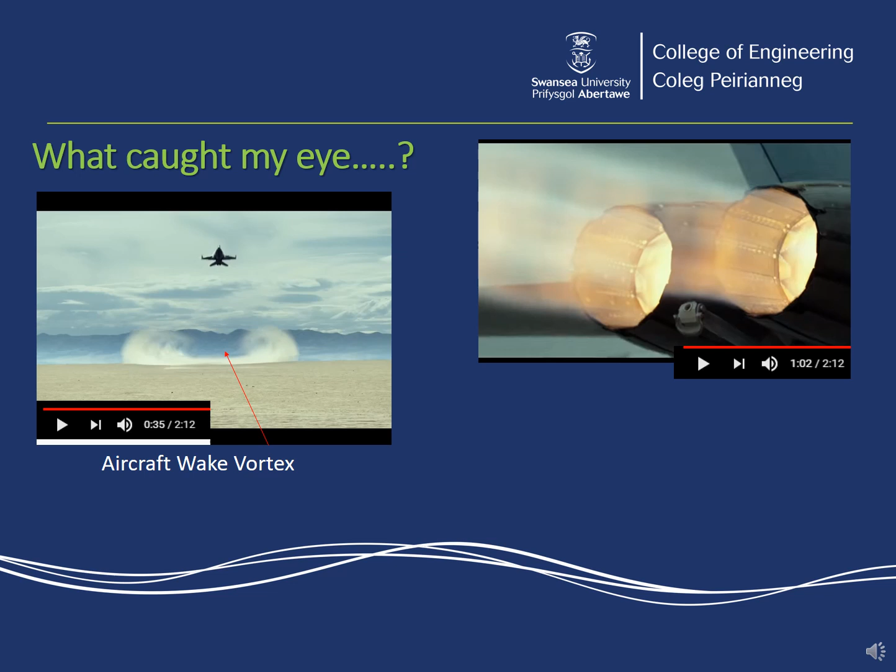So the next thing then was this image, okay? You can vaguely see you've got a slightly darker region and then a slightly lighter region in the exhaust plume that's coming from this jet engine. Okay, and what we're actually seeing there is due to the afterburner. So it's the jet engine afterburner effect.

So the afterburner is a device that's incorporated into the tailpipe of a turbojet engine, and it injects fuel into the hot exhaust gases, which then means that that fuel burns and it gives extra thrust to the aircraft. So that's why we see them on these high-powered fighter aircraft. And then what we're seeing here are shock waves. That's what these darker patches are.

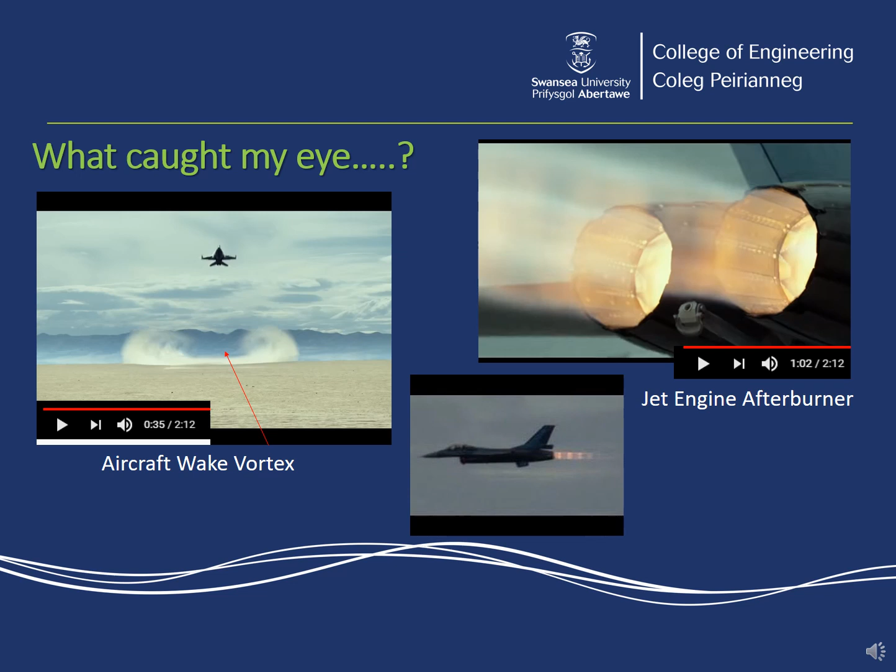So that's another image that I've taken, not from the trailer, but online. You can see very clearly there these darker sections, okay? And these are basically standing shock waves, we call them. So I'm just going to put another image up now to help us understand a bit better what's happening.

So what happens is when this high pressure air comes out of the exhaust and it's been accelerated because of the afterburner, so it's coming out really, really quickly, it's obviously at a much higher pressure than the ambient air that it's exhausting into. And so we get this really complex and interesting flow phenomena that establishes, and you can see it here in this more scientific drawing.

You get an expansion of the gas as it exits the exhaust, and then because it's exiting into this large volume of air that's at a much lower pressure, it starts to get recompressed back, and then we get something happening here, this Mach disk it's called, and basically that's a normal standing shock wave.

And a shock wave, we put this other image up here, can be termed a discontinuity in the flow. And what that means is you get a very rapid, instantaneous increase in the pressure and temperature of the gas. And that's what's happening here, and that's what we're seeing with these darker regions of flow.

And basically all that's happening is you've got a very high energy, high pressure, high temperature gas. It expands out into a much slower moving, low pressure gas, and it's trying to find equilibrium. So the high energy, high speed gas is trying to match in with the bigger volume that it's exhausted into. And so it goes through this complex flow structure, which we show here, in order to match up as soon as it can with the bulk of the air that it's moved into. And that's what we're seeing.

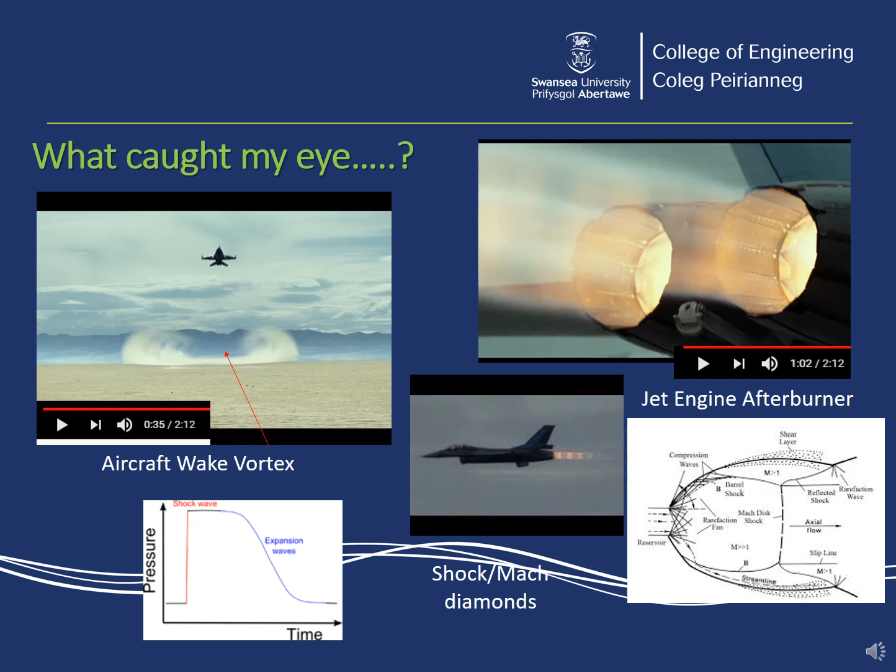So hopefully you all know, or you maybe actually have heard, a sonic boom with a fighter aircraft. And basically it's when the aircraft breaks the sound barrier, so it starts to travel greater than the speed of sound. The speed of sound is 767 miles per hour. And we use a term called Mach number.

So when something is traveling at the speed of sound, we say that it's sonic and it has a Mach number equal to 1. When something travels greater than the speed of sound, we say that it's supersonic and it has a Mach number greater than 1. And when something is traveling less than the speed of sound, we say that it's subsonic and it has a Mach number less than 1.

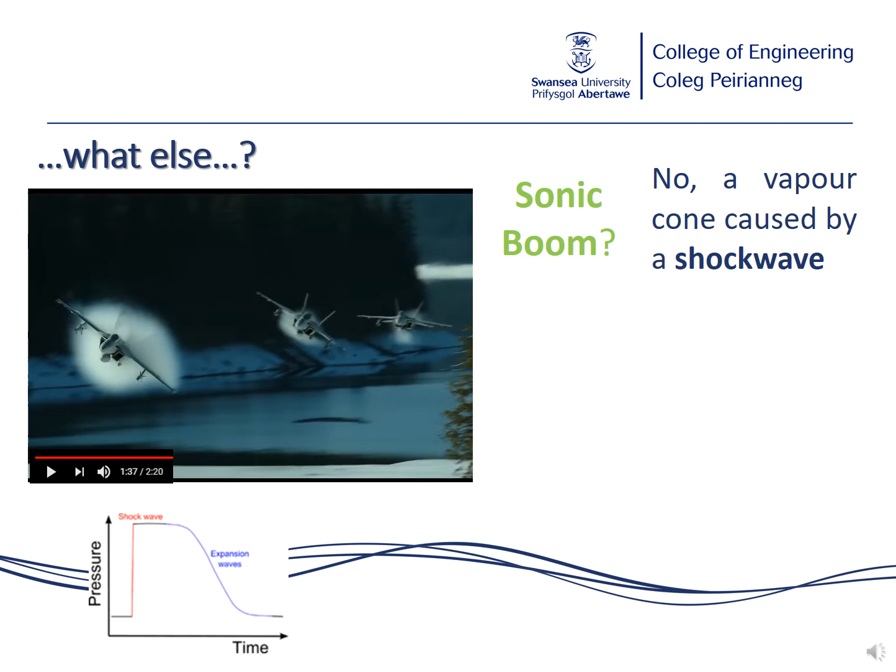And what they've done here is they've actually managed to photograph shock waves of fighter jets in flight. Okay, and they did this in March 2019, because it's taken a really long time to get a technique and all the technology needed to work successfully to actually capture these images of shock waves in flight. And the technique that they've used is called Schlieren photography.

Okay, so they're actually photographing how the light is refracted because of the shock waves, because when you get these discontinuities in pressure, you're also getting rapid changes in density. And because the density of the air is different before, after and in a shock wave, it refracts the light differently. And so you can pick up the differences in density, which allows you to visualize the shock wave. And that's what they've done of planes in motion.

But generally, how do we study and design for these flow effects? Because this technique that NASA did is not something that many people would be able to set up and carry out. So how is it that we can understand and capture these flow phenomena as mechanical engineers in order to better understand things and to improve our designs?

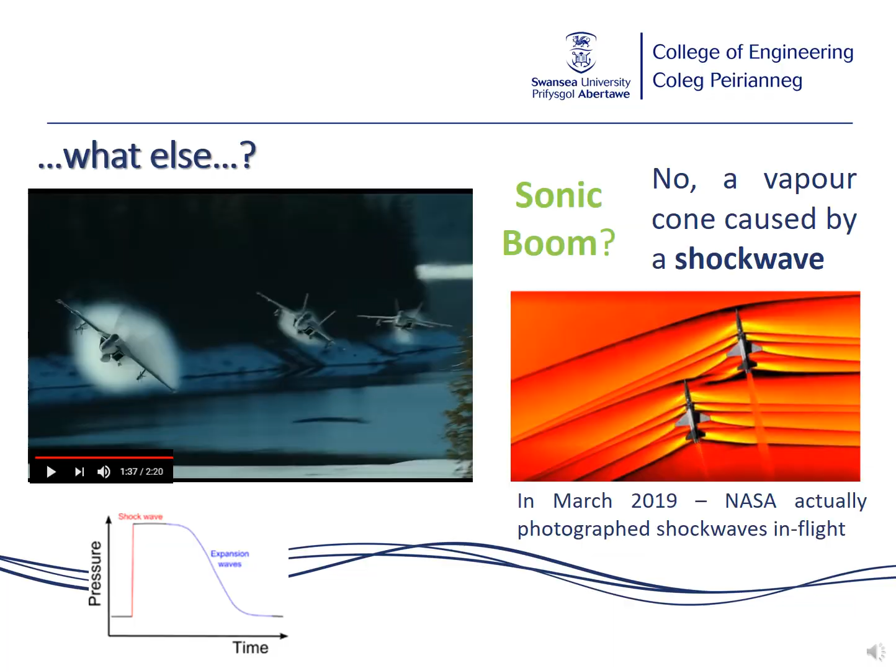So obviously, experiments are one approach. Now there's obviously a lot of experimental work that goes into underpinning designs, checking that designs work and improving designs. But generally experimental work can be very expensive. It takes a lot of time. It can be difficult to set up, and particularly when you're dealing with high-speed flows, it's very difficult to actually measure the flow without affecting it.

And what that means is, if you insert a probe in order to measure the pressure or the temperature, then by actually inserting the probe into the path of the flow, you affect how the flow behaves. So, for example, you might actually form a small shock wave in front of the device that you put into high-speed flow, which would then obviously distort or affect the measurements that you were taking. So it's very, very difficult sometimes to actually take accurate experimental measurements of certain types of flow.

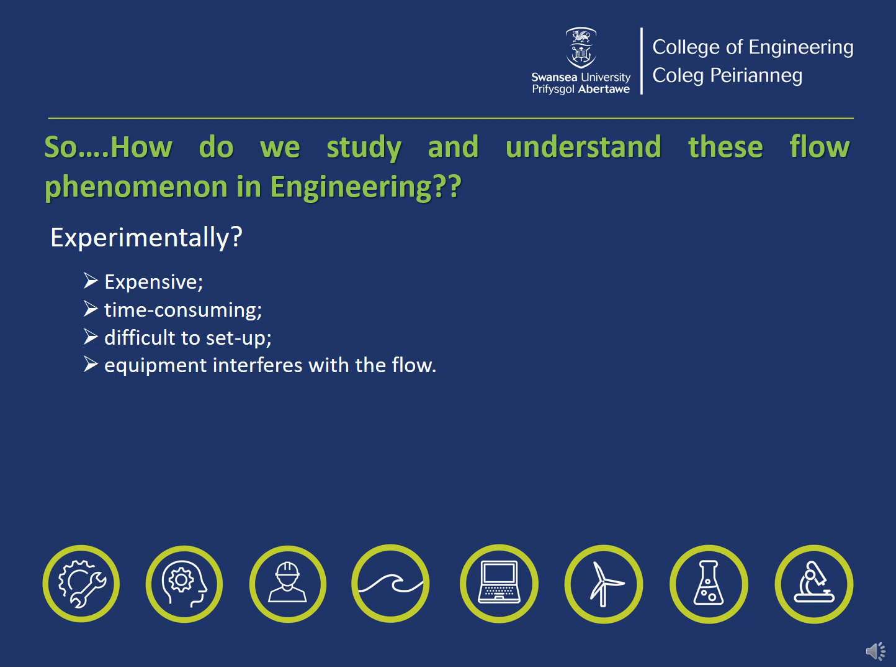And certainly it's very difficult to capture measurements of things when they're in operation. So for example, when a fighter jet is in the air flying at supersonic speeds, it's very difficult to get extremely accurate measurements of what's going on. So this is where something called computational fluid dynamics, or CFD, has become heavily utilized by engineers and in mechanical engineering in order to help us understand flow phenomena, improve our designs and better design our systems.

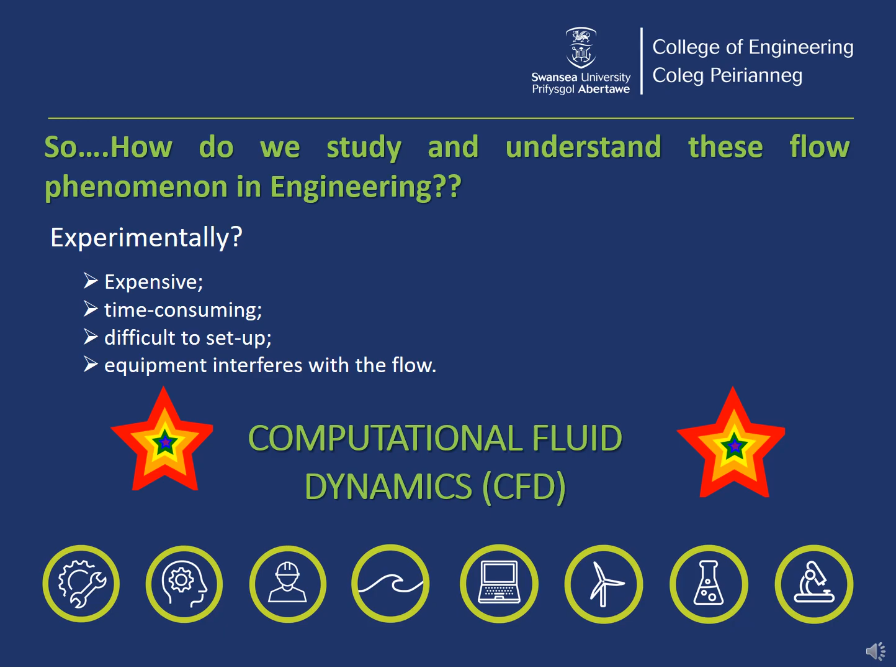And then what we do is we solve equations in every cell of that mesh or grid. So in every little volume, we solve a set of equations on a computer. Those equations are called the Navier-Stokes equations. What they're trying to ensure is that the laws of physics are obeyed, which is that mass, momentum and energy of the flow are conserved.

And what that means is the mass and the energy that the flow carries moving into the volume that we're considering has to equal the mass and the energy that the flow carries out of the volume. It can't just lose mass and energy. It can change its properties, so it can be at different pressures, velocities, densities and temperatures, but it has to all add up to what went in. And that's what those equations are ensuring.

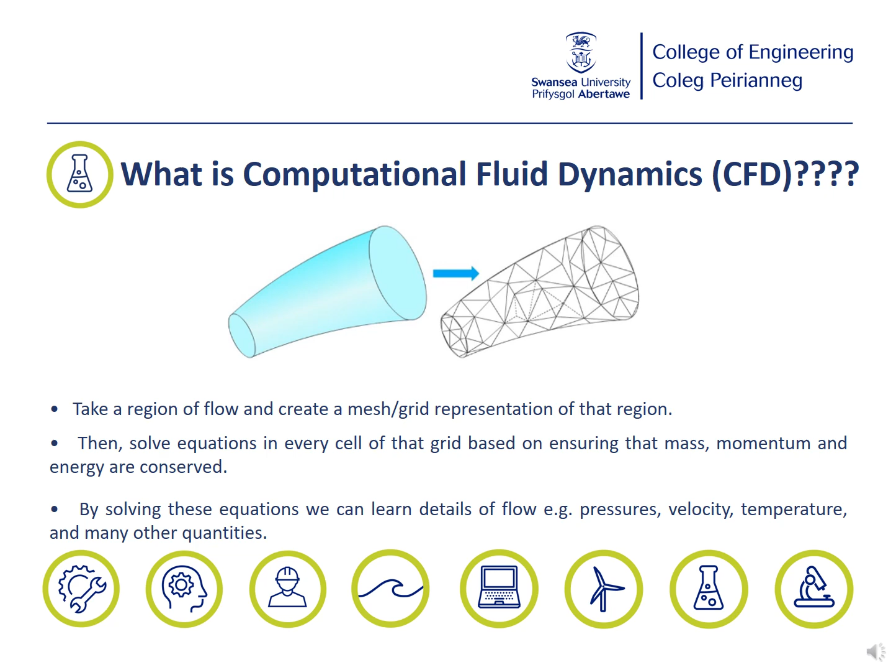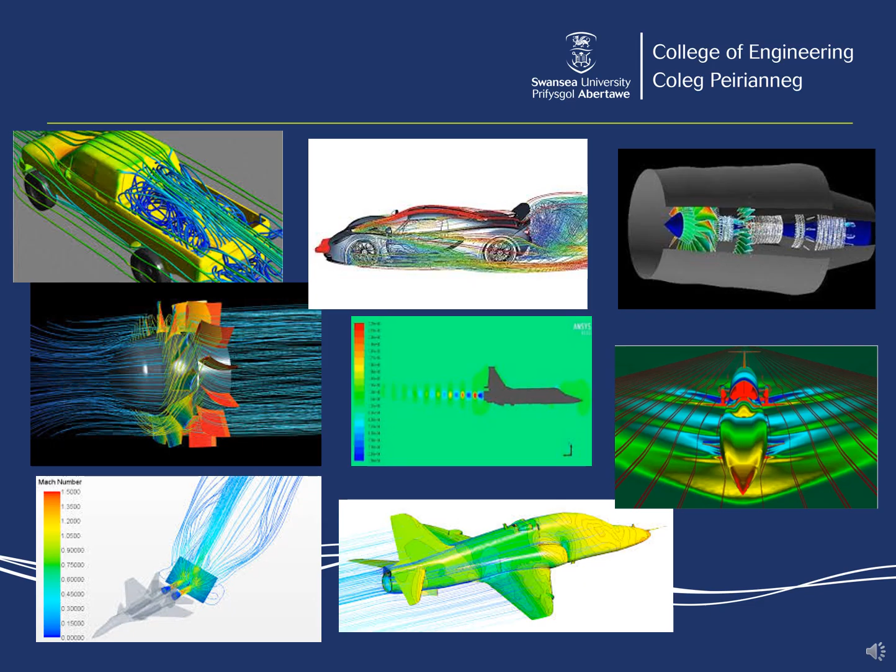So, computational fluid dynamics and mechanical engineering at Swansea University. As part of your undergraduate mechanical engineering degree, you will study modules on thermodynamics, fluid mechanics, and computer-aided design, okay? And these will form the building blocks of CFD. So you cover the initial theory around the fluid, which will help you later on in your career if you want to use CFD.

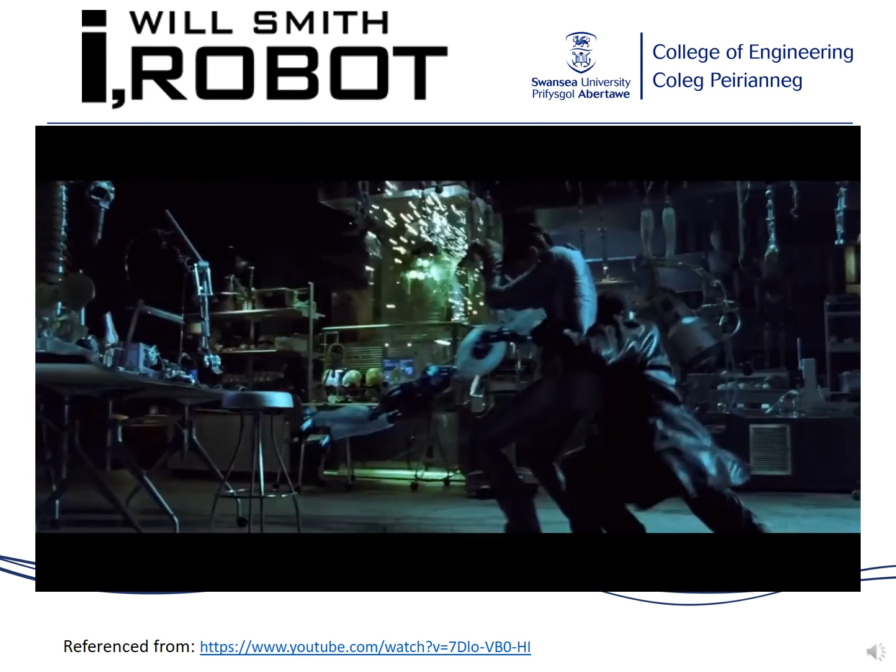We designed them to be trusted with our homes. With our way of life. But did we design them to be trusted? The rollout of USR's new generation of robot, the NS5, was marred by the death of designer Alfred Lanning. I miss the good old days, when people were killed by other people. My robots don't kill people. That thing threw somebody out of a window. Is that registering with you? A robot cannot harm a human being. Does thinking you're the last sane man on the face of the earth make you crazy? Because if it does, maybe I am. Help me find out what is wrong with these robots. Dr. Lanning suggested robots might naturally evolve. There will be one robot to every 5 humans. How many robots have ever committed a crime? There is no conspiracy. Oh, hell no. Somehow, I told you so just doesn't quite say it. You know what they say about old dogs? Not really. Gotcha.

So why did we look at that clip? I'm not trying to say to you that there's going to be an uprising of robots that are going to take over the world. I want to try and introduce this concept of Industry 4.0 to you. Okay, and so yes, robots are going to be a part of Industry 4.0, but they're only going to be a small part. It's going to be the coming together of lots of different technologies that have been developed and are in the process of being developed, and they're going to come together to revolutionize our manufacturing industry, and then consequently that will have a huge knock-on effect on how we function as a society.

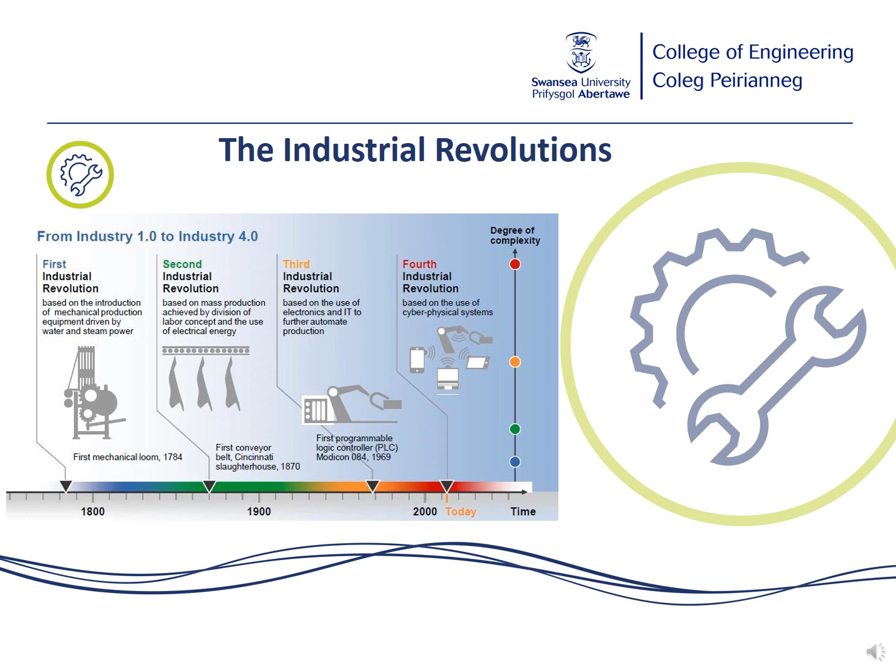So Industry 4.0 can be thought of as all these different technologies that are going to come together to move us into this fourth industrial revolution. It's certainly going to be the future of manufacturing. What it's looking to do is take the physical, real world, the real manufacturing processes, the actual product as it functions, and the virtual world, data about that product or simulations like CFD of its design, and bridge the gap between them so they work together in a loop. This will make everything much more efficient and improve understanding and optimization of how we use our resources. So it's going to change not just manufacturing, but our society as a whole.

So I'm going to introduce some of the key concepts of Industry 4.0, the technologies that will come together to push us into this fourth industrial revolution. Big data is probably the backbone of Industry 4.0. It's the idea that all processes and products are going to be acquiring data, and that data is going to be stored and used. Part of that is machine learning algorithms, computer codes that can take data, identify patterns and show us how to be more efficient, or highlight things that could be a problem.

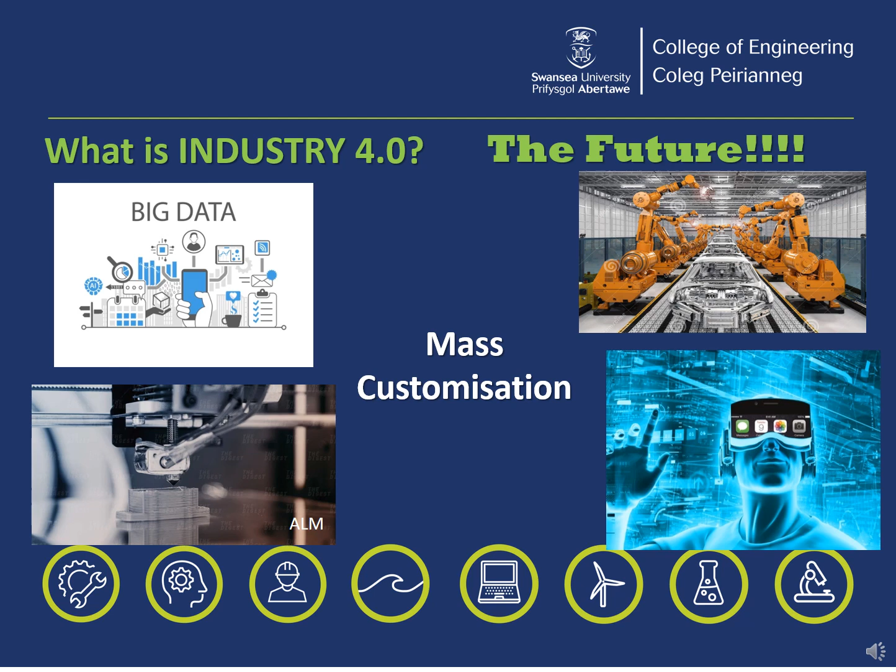Okay, you're going to help us visualize things, going to help us interact with people. And so it's all going to come together, all these different technologies. It's these merging together that are going to help us move into our fourth industrial revolution. Just a concept for that then.

And this is the Internet of Things. And I just want to introduce this because if we've got all this data and we've got this connection between the physical world and the virtual world, we need this way of communicating the data between those, and this is the Internet of Things. Okay, and so we are starting down that path.

If you think about smart meters in our homes, they take data about our energy usage and they provide that to the energy grid. And what that means is that the energy suppliers can have a better idea of the quantity of energy that's used, how different households use energy, at what different times of day, and it means that they can better optimize and equip the energy supply system.

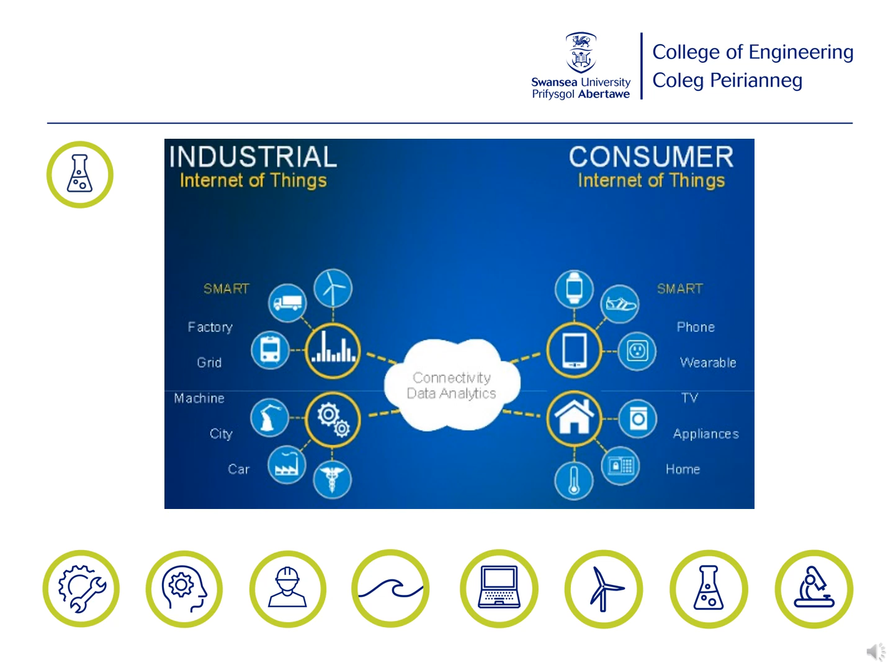So that's sort of it creeping into our day-to-day life. But in order for all the data to be transferred and stored, we're going to have to implement this idea of the Internet of Things.

So Industry 4.0 and Mechanical Engineering at Swansea University: you do actually have an undergraduate module on Industry 4.0 at the university. And there we go into a lot more detail about big data. We look at different machine learning algorithms. We consider the different technologies.

And we also think about different aspects like cybersecurity and how we can implement protocols and methods to make sure that when these technologies are brought into companies, it's done in a sensible, structured way. We'll be preparing you to work as engineers in the fourth industrial revolution.

So we have 3D printing labs at the university. We've got a new research institution which has just been built and opened, which is specialising in materials processing and numerical technologies, so this big data side of things. And looking down the line, there's going to be the development of the Factory of the Future, which is actually looking to develop and demonstrate a lot of the Industry 4.0 technologies in partnership with industry.

So we'll have one final trip to the movies, and this topic will take us back on to more of the sort of traditional topics and ideas that we associate with mechanical engineering.

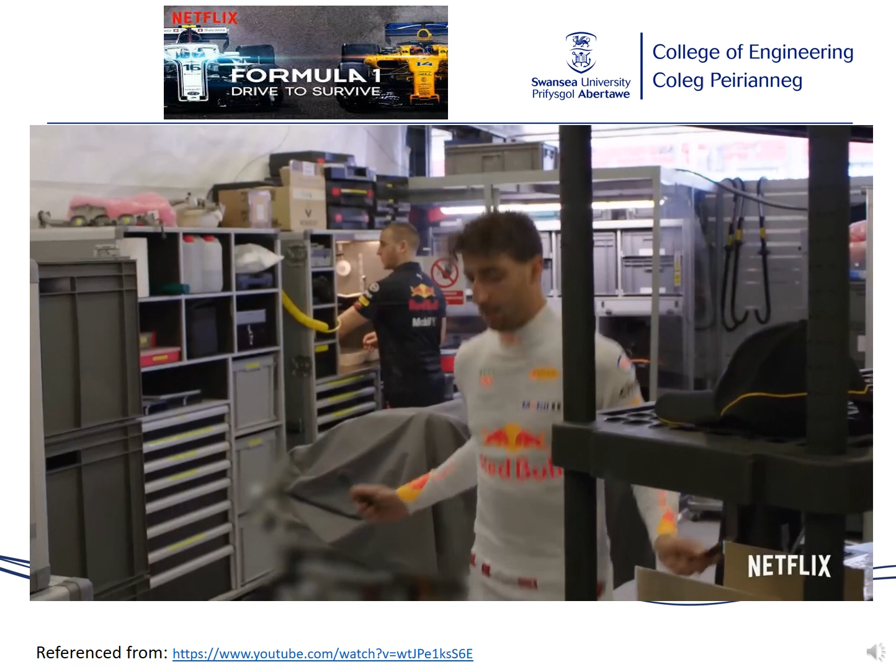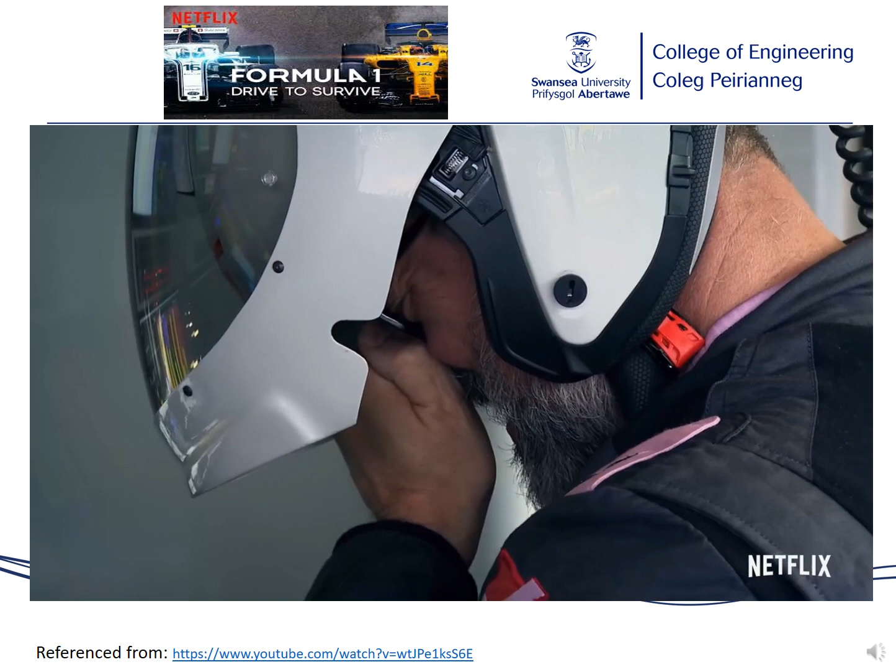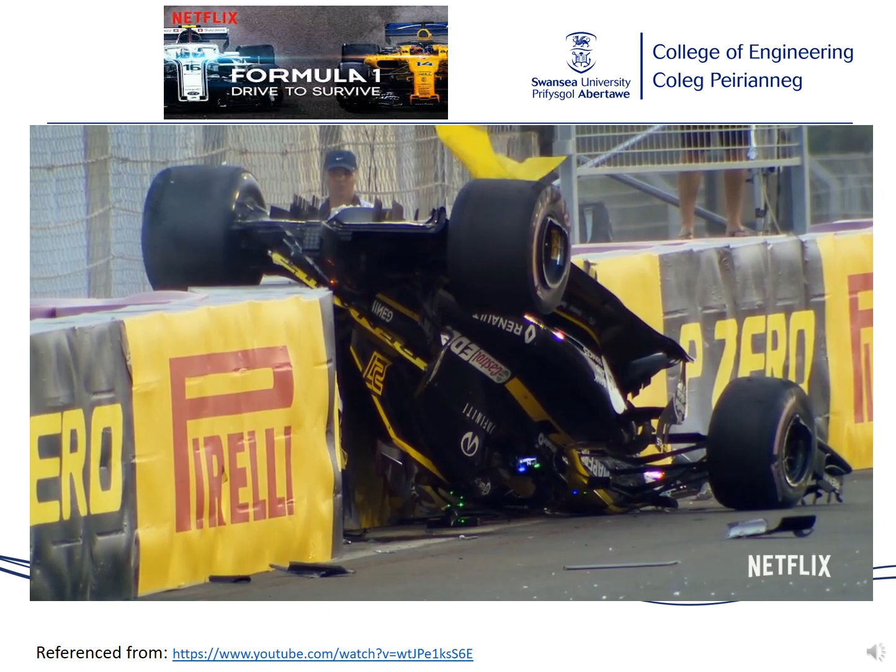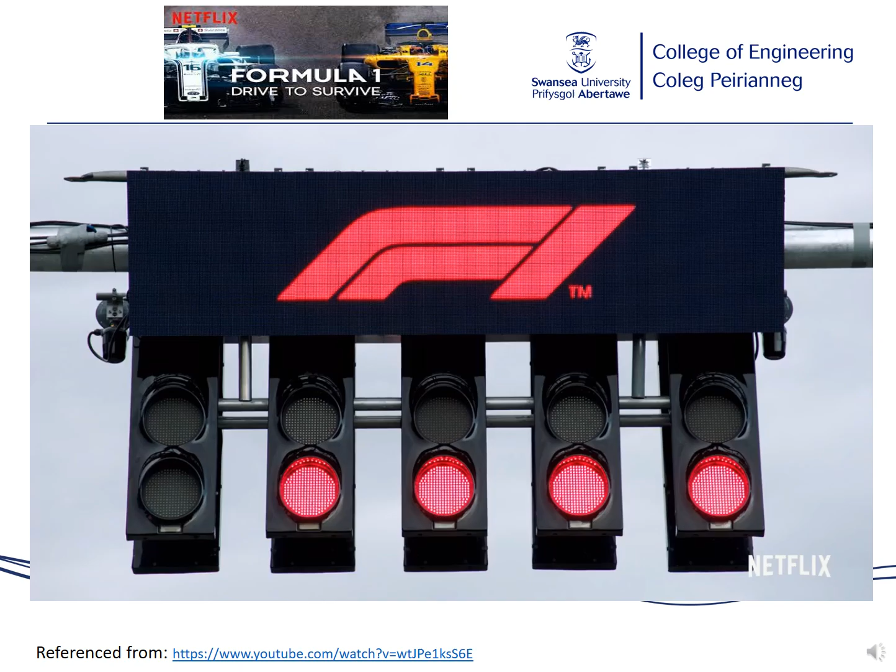That's what separates them from mere mortals. All I ever do is pray for a safe race. I never thought that I'd be there one day watching my son. For me, it's heart attack after heart attack. Are you okay, Nico? Get me out, there's fire. I love the danger, that adrenaline, that excitement. They have crashed! They've gone into each other! To get the best results possible. I'm not worried about dying.

So Formula One is obviously something that springs to mind as very much a mechanical engineering topic because it's cars, it's engines, suspensions. But Formula One is really to be admired within engineering. They are very much at the cutting edge of developing all sorts of technologies.

So the BabyPod incubator. So this was actually based on the carbon fiber developments that they came up with to raise the standards for the Formula One drivers' safety cells.

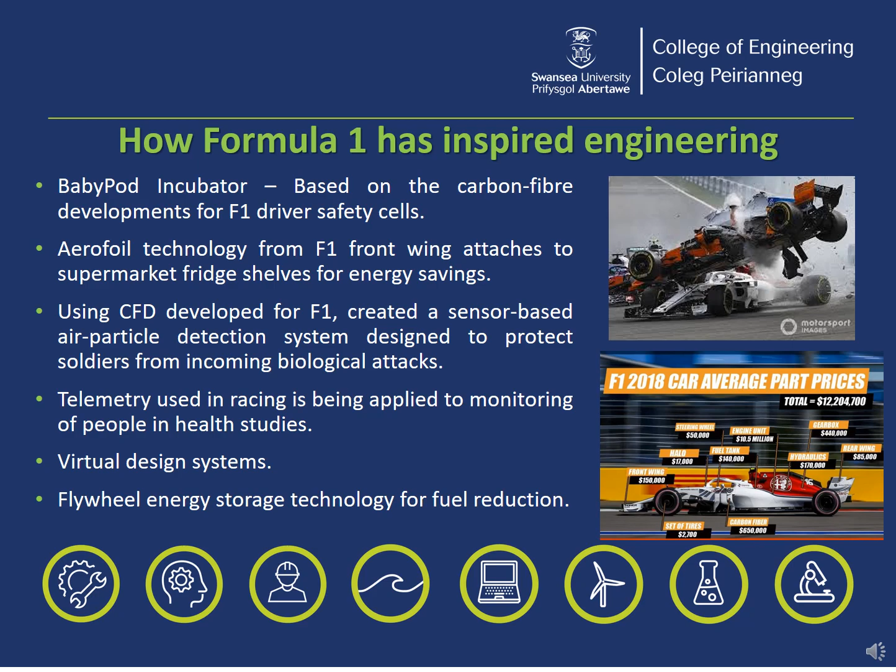So considering Swansea University, we have the Formula Student programme. So we have Swansea University Race Engineering, or SURE, and this group, they design, build and race cars for the Formula Student competition. So Formula Student is when these teams from universities all over the world will design a Formula race car, and then they'll come and they'll compete at different categories and at various locations. It can be anywhere in the world, changes from year to year.

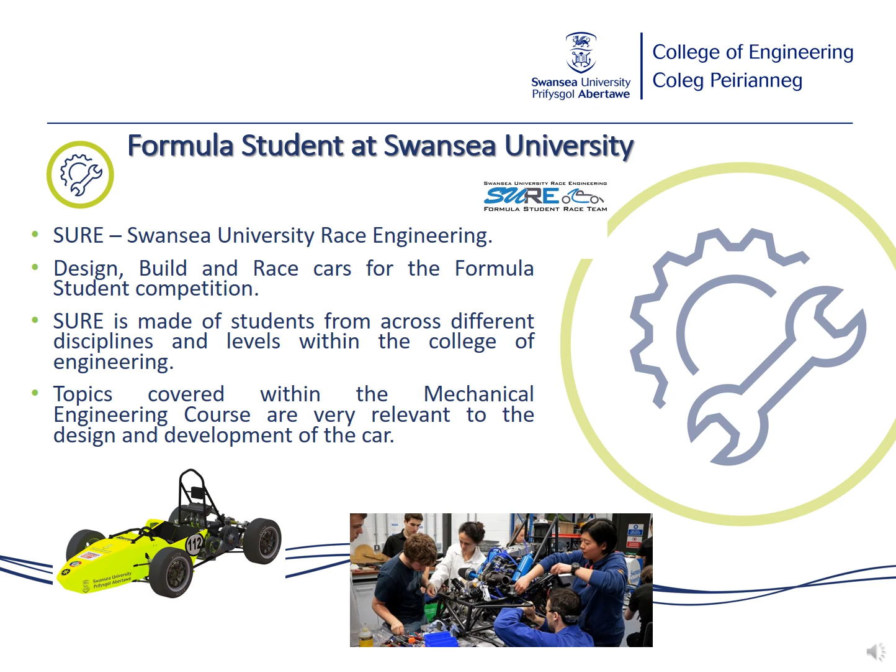And so the actual SURE team within Swansea is made up of students across all the different engineering disciplines and from all the different years, and postgraduate as well. And the topics that you cover studying mechanical engineering at Swansea are obviously extremely relevant then to how you would design and develop the car. So if you're interested in that side of things, maybe a career in Formula One or the automotive industry, you can then do that, and that filters into your studies.